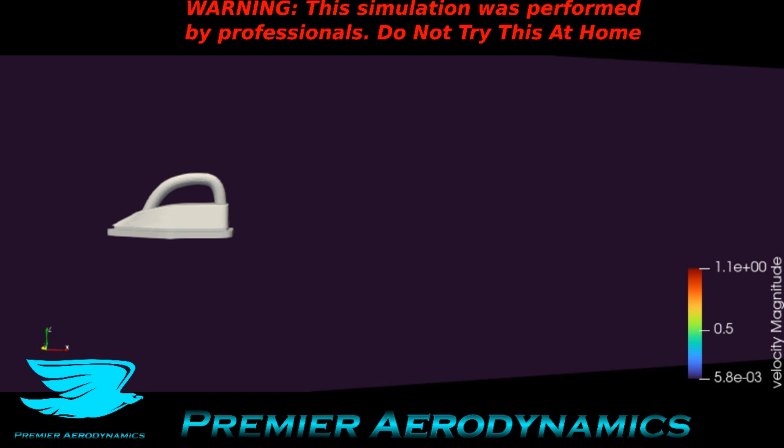What's up, amigos? So we had a request from one of you amigos, Marco Vukadin, to test the aerodynamics of an iron. And being the lambs we are, here we are.

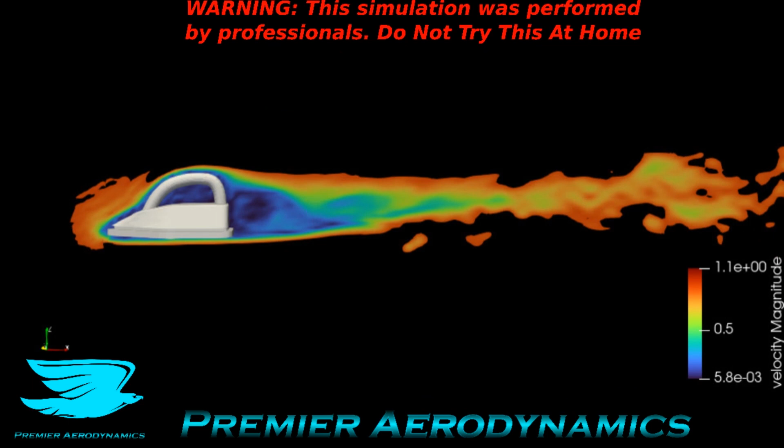And this Y plane shows a pretty nice angle. It shows that, okay, there is a fairly decent wake, but it behaves itself quite nicely. It's only about one iron downstream where we start to have the wake dying out quite a lot, and you have a fairly nice flow. So that's why this iron has quite a low drag coefficient.

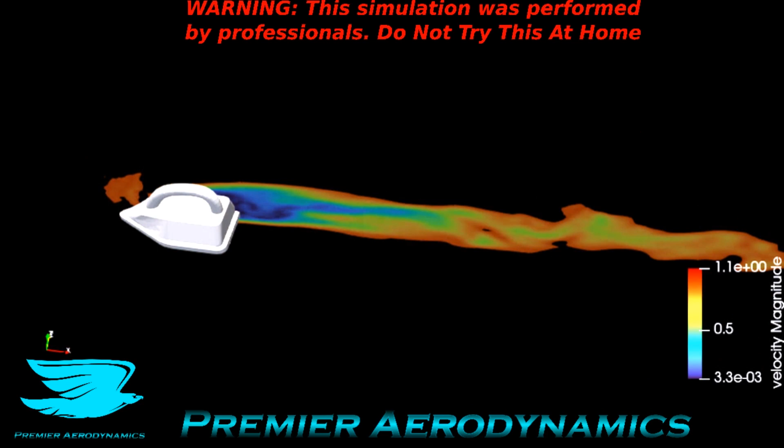Interestingly, it also has a negative lift coefficient, so it actually produces downforce. It's minus 0.041, which is actually also better than most cars as well. Most cars don't produce such a nice downforce, and that's potentially a problem for handling. So irons might be the way of the future.

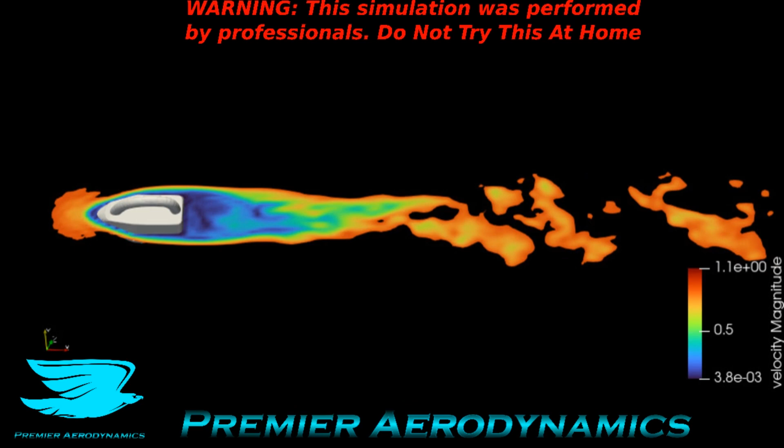So this Z plane goes halfway through the iron, and as you'd expect, there is a periodic shedding of the flow from one side to the other because it is still a fairly bluff body at the back. The front is quite nicely streamlined, but the back you could make better by making it sharper so the flow can stay attached longer instead of just separating at that trailing edge.

So this handle I'm quite interested in. I have a Z plane going through it, and for how small it is, it produces such a big wake. So this is probably one of the biggest culprits in terms of producing drag. If you were to remove this handle, the drag of the iron could drop significantly. In fact, it would probably go down below 0.2, I would imagine. So this handle could be more streamlined or completely removed.